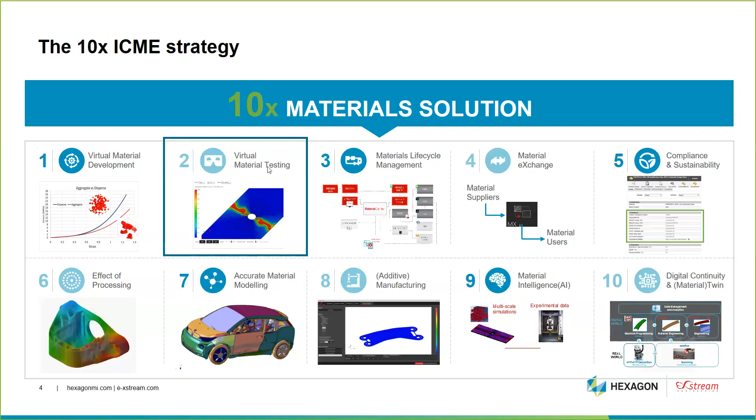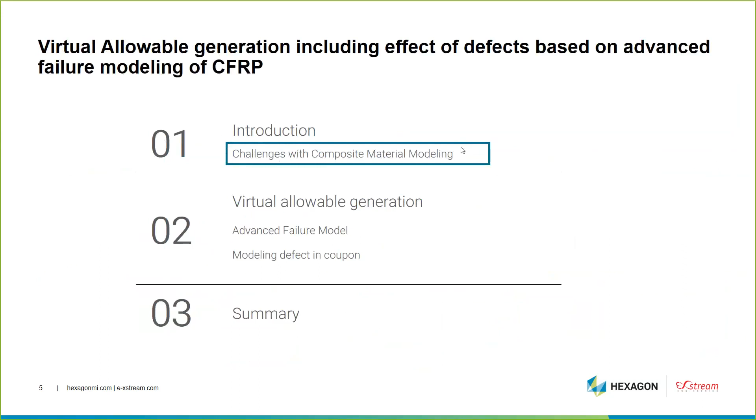So let's start with a presentation of the challenge concerning composite material modeling. That will be short. We know that when we do the insertion of composite material in a new design, we have to follow what we call the building block approach. The building block approach aims to verify the correct choice of the material at every level of that pyramid. The first level of this pyramid concerns all the work that has to be done at the coupon level, from material screening, material specification development, and generation of the allowables.

And since we have introduced composite material into the design, the size of this first level, by the need of comparing and screening different configurations in terms of layup, in terms of coupon configuration, in terms of environment condition, makes this first level of the pyramid extremely time-consuming and requires a very large experimental test matrix. So one of the challenges at this level is to try to decrease a bit the workload associated with all this work at that level.

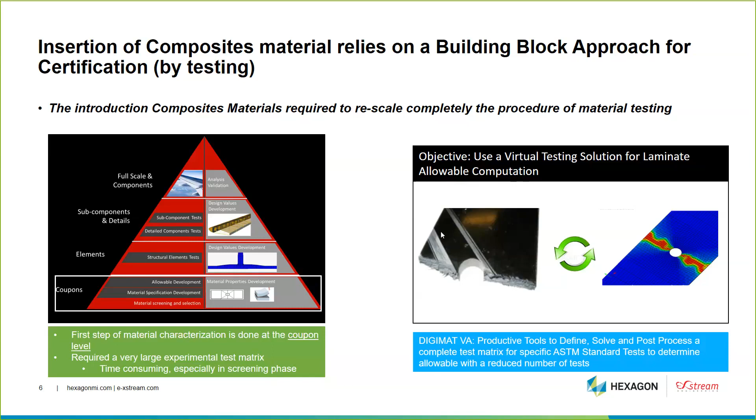So when we started to develop this platform, we had to tackle a series of challenges. And the first challenge is obviously to be able to make an accurate prediction of the failure of the coupon. And as opposed to a metallic material, which exhibits a very clear modification in its behavior, like non-linear yielding, for composite, the only reliable and observable event is the final failure. And most of the time, what is considered as the allowable is the final stress or the final strain.

And when we load a coupon like this, we can observe a very brittle failure, but between the moment we start to load the coupon up to the final failure, some critical events take place on the coupon, such as initiation of matrix cracking, initiation of fiber breaking. And if we want to be able to predict the final failure, we have to use a numerical model that is able to predict all the critical events that take place before the final failure. So that's the first challenge. It's to develop or to use a material model that will be able to predict properly all the critical events that take place in the composite or in the coupon before the final failure.

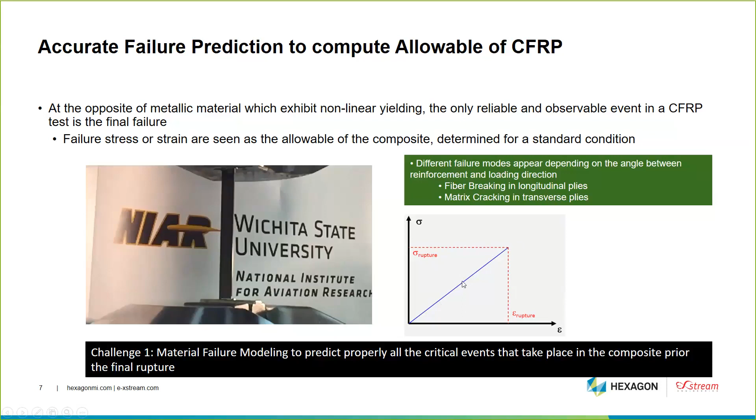Then we have another challenge when we use composite material. If I replicate 5 times, 10 times the coupon that I've just used before, I will never get 10 times exactly the same final strength. So, unlike metallic material, what we observe with composite is a larger distribution of the final strength. So this raises the need to use what we call the allowable material, which would be a material property that is statistically derived from test data coming from a stable process. And this value, which will be used for the design, must be a value of confidence. So that's why we give the possibility to generate a B-basis value to take into account this distribution of final strength of the coupon.

That's the second challenge. If we want to be able to predict a distribution of results like we observe experimentally, then we need the possibility to define a test matrix that will allow us to capture the variability that is expected during the production and during the life of the coupon, variability that can come from several sources. So we give the possibility in Digimat VA to define a test matrix. We follow recommendations coming from the FAA, and this test matrix will allow us to introduce variability at the material level, at the process level, let's say at the generation of the panel, and also what we call the post-process variability, the variability that can come simply from the way we test the coupon. So that's the second challenge: the possibility to insert some variability during the generation of the coupon strengths.

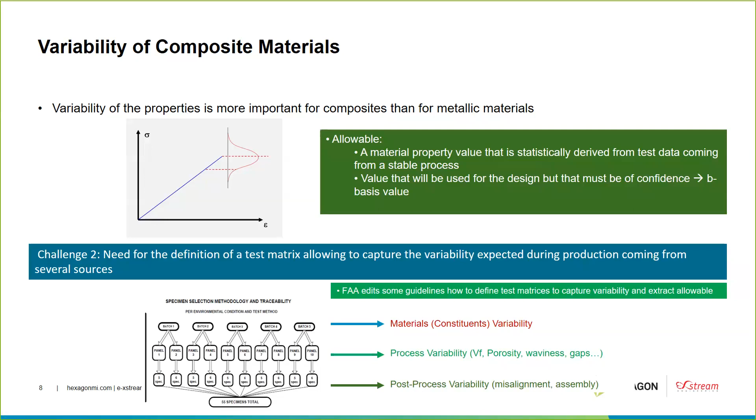A last challenge is the possibility to take into account the effect of defects when we compute the allowables. We know that there are defects that appear in the composite material during the manufacturing process. We have several types of defects, such as porosity, waviness, or fiber breaking, and those types of defects appear no matter the type of manufacturing process that we are using. Porosity can often be associated with RTM process or autoclave. Thermoforming can lead to waviness or fiber breaking. Automatic fiber placement can lead to the presence of gaps in the coupon.

So no matter the manufacturing process, we know that there is some defect in the composite. And we know that the sizing of the composite part, or let's say the value that we use for the sizing, should take into account the presence of those defects that come from the manufacturing process. And each defect will affect the mechanical property, which depends on the type of the defect, the size of the defect, and the location on the coupon.

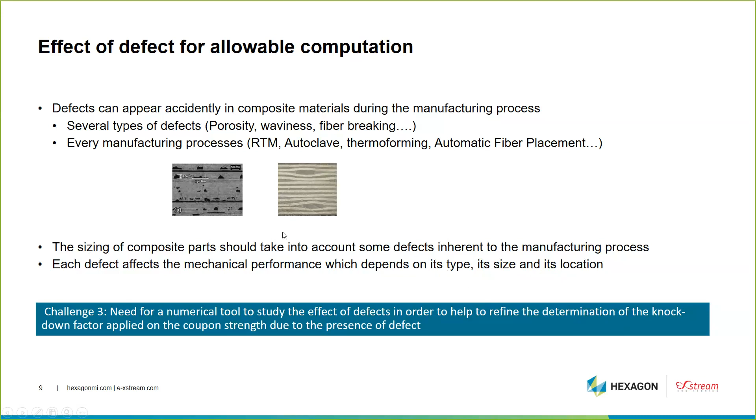So that's why we have a third challenge, which is that we need to have a numerical tool that allows us to study the effect of defect in order to help the refinement of the determination of the knockdown factor that is applied on the coupon strength due to the presence of defect. We will see in detail during this webinar how we handle this third challenge.

So we have put all those capabilities, all this knowledge in the platform Digimat VA, which is our platform to compute virtual allowables. So on this slide, I have given an overview of what Digimat VA is. It's a platform that will allow you to have a very efficient framework to automate the test matrix generation and to execute your test matrix. We'll see in detail how we handle that. And then once you have defined the test matrix, you can post-process and you can manage the resolution of the coupon.

In Digimat VA, we have also proposed a connection to Material Center. Material Center is our material data manager. And then in Digimat VA, we propose also several levels of fidelity in terms of failure model. So we have some tools which are based on the classical laminate theory and associated with first ply failure. That's not something I'm going to show today.

We have also a first implementation of our failure model, which is what I call here the quick failure model, which corresponds to what we implemented when we created the platform, let's say 4 years ago. And we have the new advanced failure model, which is based on an academic state-of-the-art, which is something that I'm going to show you in detail right now.

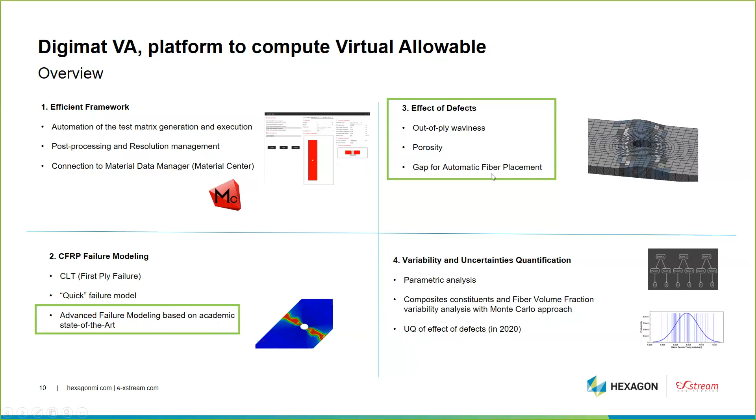So let's go into detail of this new advanced failure model, which is available since the last version of Digimat. If we think about what we need when we define an advanced failure model, this model should be able to predict the critical events prior to the final failure. That's what we have seen as the first challenge. But also, as we know, when we deal with damage in finite element simulation, we'll have some challenges coming from what we call damage localization. So an accurate failure model should have capabilities to limit the mesh sensitivity and the damage localization.

And also, last thing, a damage or material model should be easy to use and should rely on measurable parameters, so parameters that we know how to identify and how to use, and whose meaning in the numerical model we understand. Also, to address material variability, the numerical model must be expressed in terms of constituent properties and fiber volume fraction.

So to answer those needs or those challenges, what we have done is we have implemented a state-of-the-art academic framework, which has been proposed by Professor Camanho. So we started from collaboration with Professor Camanho, and we base our work on those three references. Well, there are more references; those ones are really the ones who proposed the foundation of this numerical model. And this one has been implemented in Digimat 2019.1.

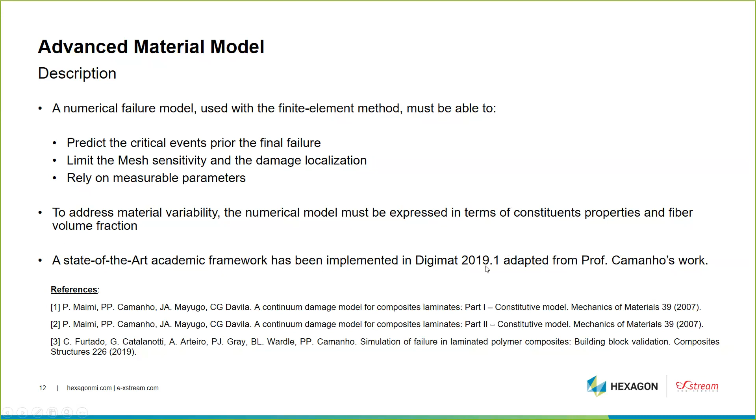So if we look into the detail of the key ingredients of this numerical model, the first point is that we use an elastoplastic behavior coming from the resin. And the way this elastoplastic behavior of the resin is identified, it's extracted from the in-plane shear curve of the lamina. So knowing the in-plane shear curves of the lamina, we are going to extract the elastoplastic behavior of the resin.

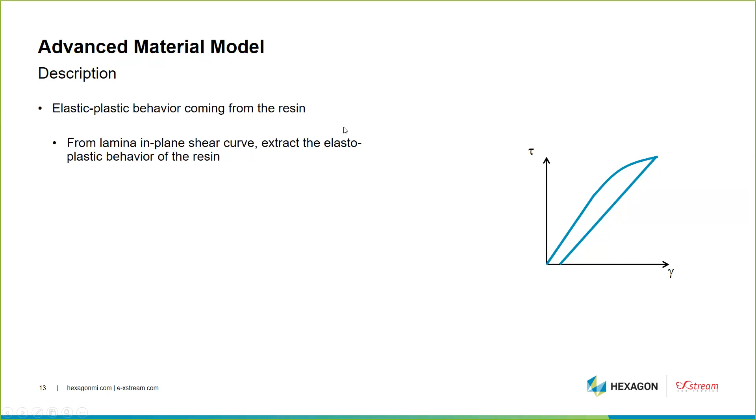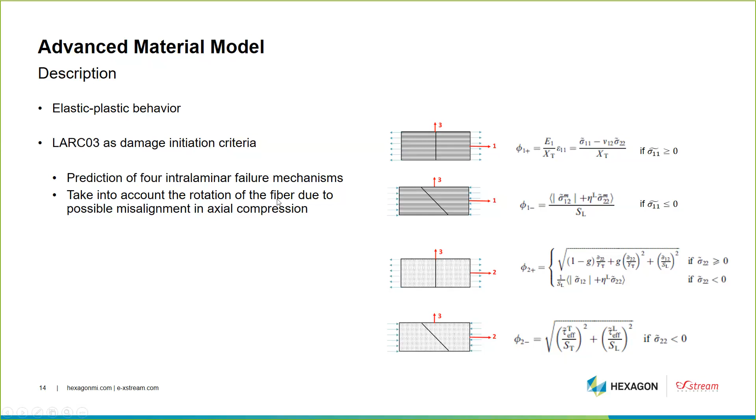Second ingredient of the numerical model, we use LaRC03 as a damage initiation criteria. So LaRC03 is already something well established in the community, and it's a failure criteria that allows to predict intralaminar failure mechanisms. This LaRC03 also has something extremely interesting: it takes into account the rotation of the fiber due to the misalignment in axial compression.

So if we see that in detail, when we are in axial compression, the model will consider that under axial compression loading, the ply will fail due to fiber kinking, where the resin in the vicinity of the local misalignment of the fiber will fail in compression. So this is what is represented here on that scan: we have here a misalignment that appears, and in the vicinity of this misalignment, the matrix will fail in compression.

So in the failure model, the failure model proposes a methodology to compute this angle of misalignment. So this is what is noted phi here, which is based on material property or lamina property. You see that here we use the XC to compute the misalignment angle. It computes also what we call the longitudinal friction coefficient, which also relies on material parameters.

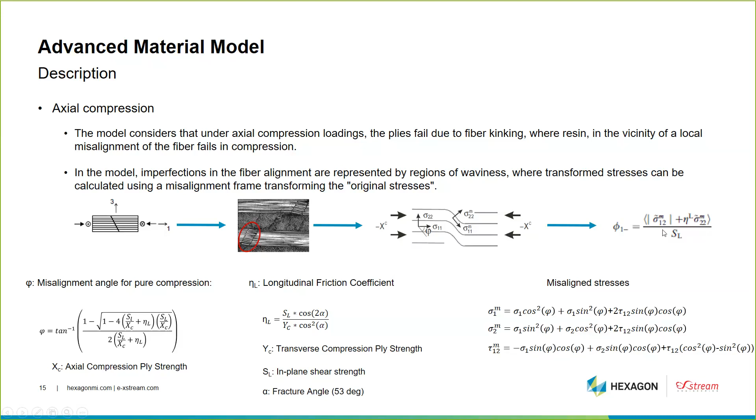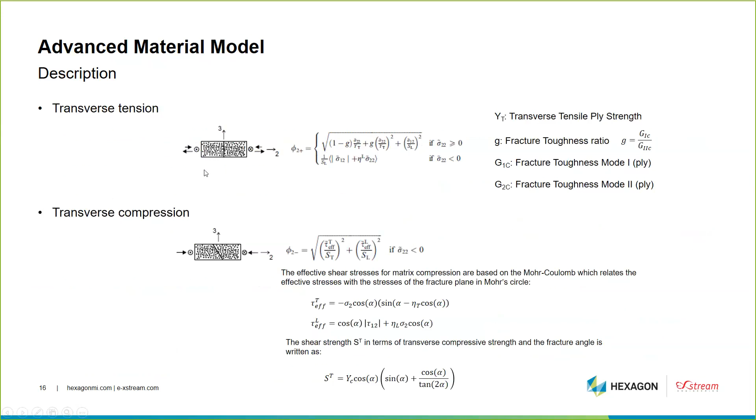So once the misalignment angle has been computed, then the stress can be rotated into the misalignment frame, and the failure criteria can be computed using those rotated stresses. For transverse tension and transverse compression, we always have a combination of the transverse stress, sigma 2, with the in-plane shear stress. So that's the case for the transverse tension, and also for the transverse compression.

So once we have defined and computed the damage initiation criteria, we need to propagate the damage. So we need some damage propagation law, and in this case, we have coded the damage propagation law proposed directly by Professor Camanho. So that's what is called here the University of Porto damage model. And this damage model includes the crack closure. So the damage initiation thresholds are related to damage variables by the damage evolution law. So the damage initiation threshold is LaRC03, and then the damage evolution laws are the ones proposed by University of Porto.

And we have the possibility to take into account the crack closure when we reverse the loading. So typically, if a crack is created under tensile loads, it will close up under compressive load, and the material will recover part of its load carrying capability. So that's why we see here that we have the propagation law R1 minus, which depends only on the compressive condition. But at the opposite, a crack created under compressive load will remain open under tensile load. So that's why here we have R1 plus, which depends not only upon the failure in tension, but also on whether we have seen some compressive load prior to the tension condition.

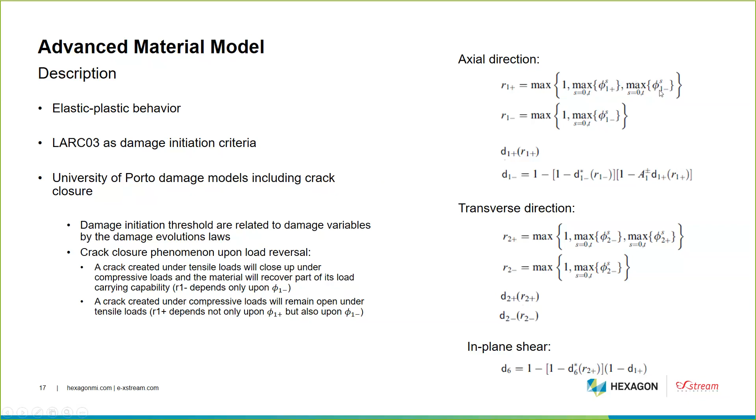So the way those propagation laws are defined, they have a specific shape. They are linear and bilinear softening damage evolution laws. So this is the typical shape that we use, bilinear and linear, depending on the loading condition. And those evolution laws are associated with a crack band model. So here, the propagation law is a function of a physical parameter.

So those propagation laws are defined as a function of the intralaminar fracture toughness to correctly reproduce the energy dissipation during the propagation of the damage. But those propagation laws are also a function of the characteristic length of the finite element to decrease the mesh size sensitivity, making sure that we have the same quantity of energy dissipated per unit area of crack propagation, no matter the size of the element. So typically that's the crack band model. It means that the area under the propagation law is connected in some way to the volume of the finite element.

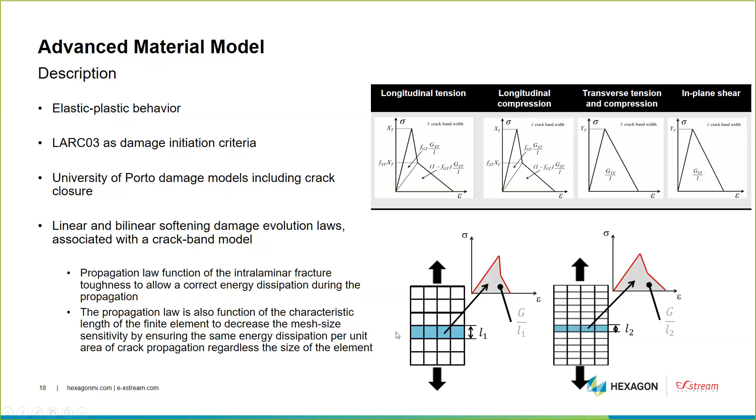Another feature of this model concerns the delamination. In this case, delamination is handled using cohesive zone elements. It's based on cohesive elements, and we use the Benzeggagh-Kenane energy-based criterion to predict the delamination under mixed mode loading conditions. What we have coded is simply the framework that has been proposed by Professor Turon from Girona University in Spain.

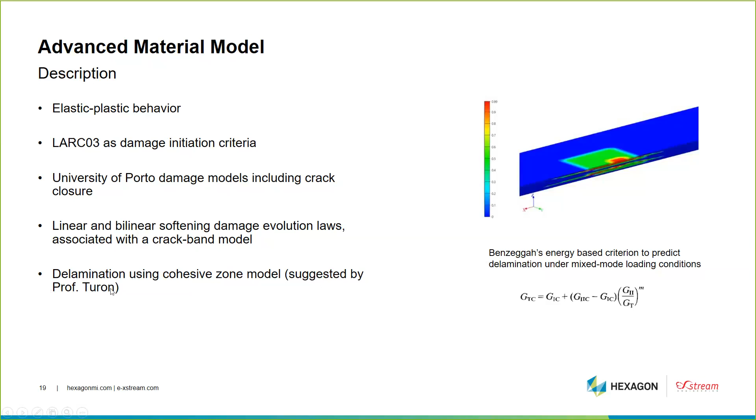The model handles also the in situ strength. The in situ strength is a modification of the strength of the ply, only the strengths that are governed by the matrix, so YT, YC and the in-plane shear. So it's a modification of those 3 strength values based on the localization of the ply in the laminate.

And then the last feature corresponds to the possibility to take into account manufacturing stresses. This is a feature that we added to take into account residual stresses coming from the curing cycle. It means that before we load the coupon mechanically, we apply a thermomechanical load from the curing temperature to the room temperature in order to introduce some residual stresses in the coupon before the mechanical loading. And this is done now systematically once we use this advanced failure model.

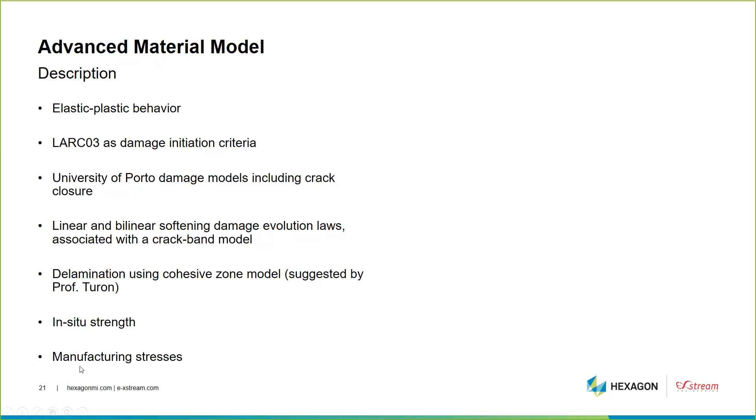So at the end, we end up with a list of material parameters. Typically we have here the lamina data: the stiffness and strength, axial, transverse, tension, compression. This is typical data that we can find in the datasheet. And we need some additional parameters to handle the damage propagation laws, what we call here the intra-ply fracture toughness for the modes, axial, transverse, tension, compression.

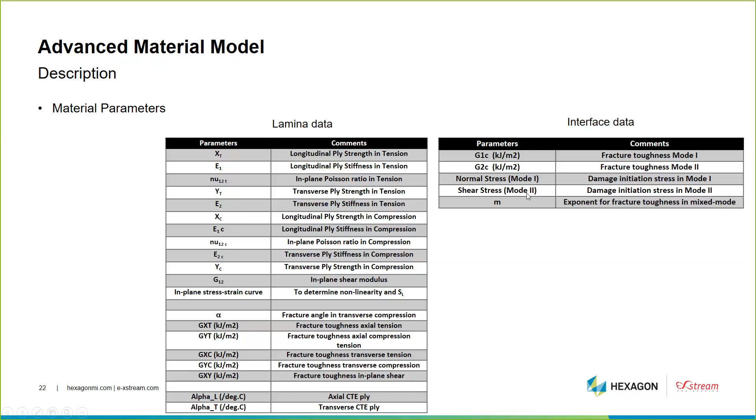We need also the coefficient of thermal expansion of the ply, the axial and the transverse. This is to take into account the residual stress coming from the manufacturing. And then we need also the interface data: the fracture toughness in mode 1 and mode 2, and the normal or damage initiation stress in mode 1 and in mode 2.

This advanced failure model has been implemented in our platform, Digimat VA. For those who don't know, Digimat VA proposes an extremely simple workflow to define, set up and solve a test matrix. The workflow follows specific steps, a very straightforward workflow. First, we have to define the material data, the material parameters that I've just listed, which need to be entered in the software. And then the user has to define the layup. Quite straightforward, we can define any type of layup.

And then we have to define the test geometry. We propose a library of tests, which are all parameterized, so the user can really define the configuration that he would like to test. After that, we have the possibility to insert variability, but like I explained, I won't go into the detail of the variability today. The variability is an option; we don't always have to integrate it. So let's assume that we don't have variability here.

Once material data, layup, and test configuration have been defined, we can go for the resolution. It means that Digimat VA will create a finite element model corresponding to each configuration and solve this finite element problem. Solving it means that we extract the stress-strain curve, and we consider that the allowable is the maximum of the stress-strain curve.

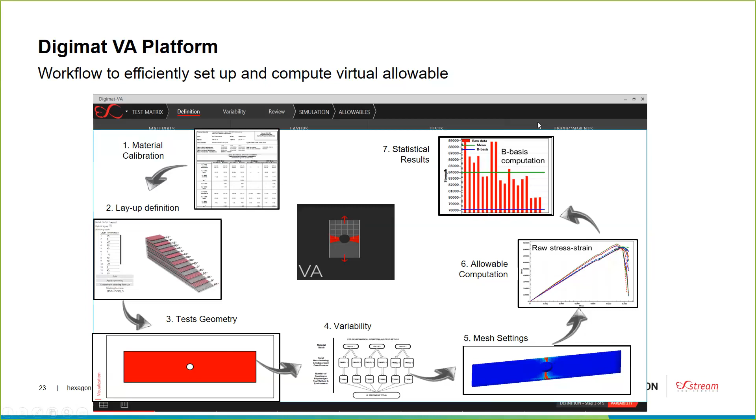So this is, for example, how the parameterization of the coupon is handled in the platform. I will do a demo right after, but during the workflow, the user has to select the type of coupon he wants to insert in the test matrix. So we cover, for example, the unnotched configuration, the open hole, the filled hole, and we also have a configuration I will show on the slide after.

But each coupon has been parameterized, and the user can really set all the dimensions that he wants. For the coupons that have a fastener, like the filled hole and the bearing test, we have also parameterized the fastener geometry, and the user can choose between different types of fasteners, so countersunk, protrusion, and define the properties.

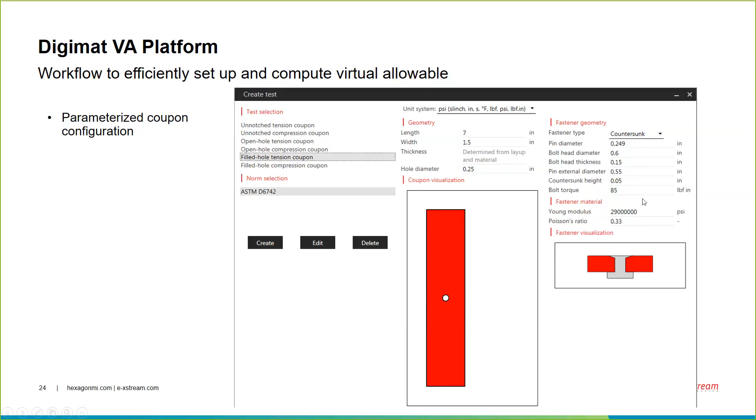These are all the tests that are covered in the platform. So from unnotched test, open hole test, tension, compression, the filled hole, again with different geometries of the bolt, the bearing test, single shear bearing, double shear bearing with one bolt or two bolts, and also the V-notched rail test.

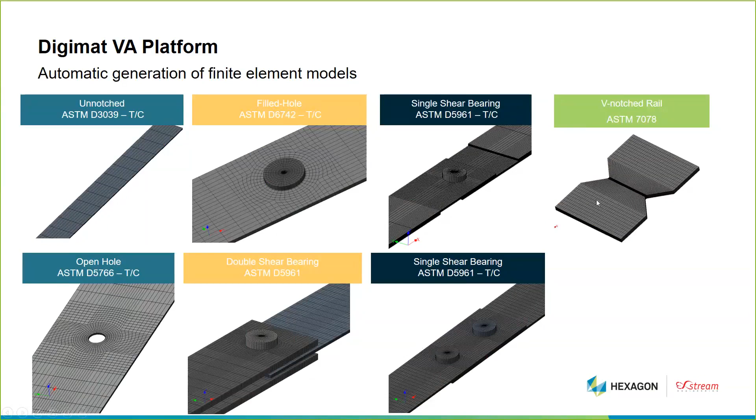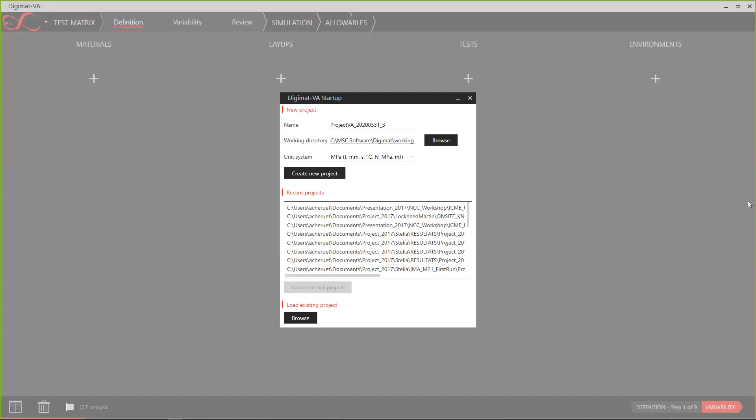Okay, so at this point, I will do a demo just to make sure everybody is clear with the platform. When you open Digimat, you have this first landing page. What we are going to do is open Digimat VA, and then I will create a new project. Here you have the data tree, which gives all the steps of the workflow. So the first step is to create a material.

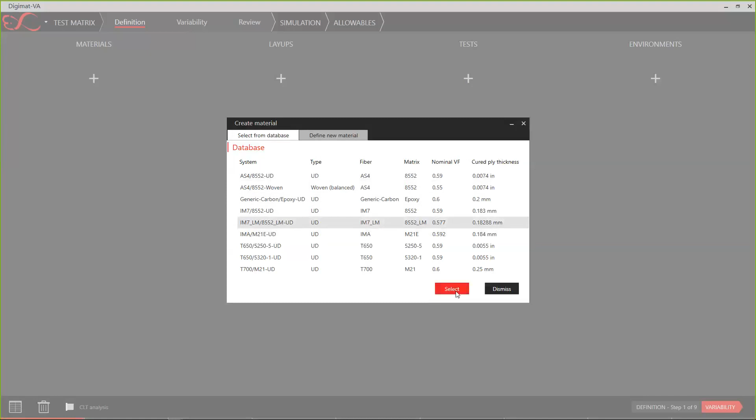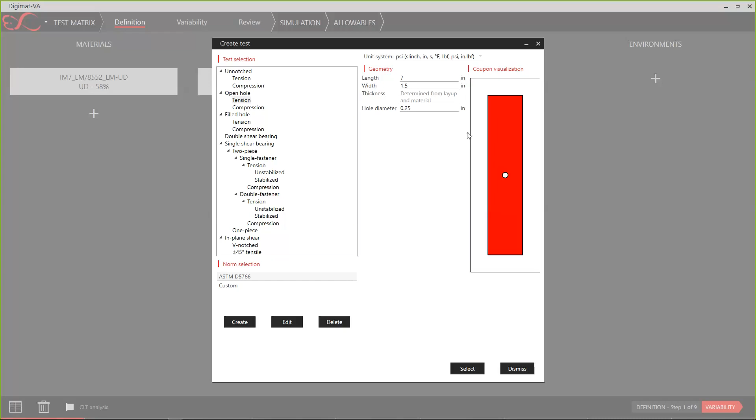So I will select one material here. Let's say I will take this IM7/8552, which is noted here underscore LM, which means last model. This is the name I chose to define the IM7/8552. Then I can define all the layups. You can define some predefined layups and save them in the database to reuse easily for different usages. Here I will select a quasi-isotropic layup, and then you can select the type of coupon that you want to test. I will choose, for example, an open hole.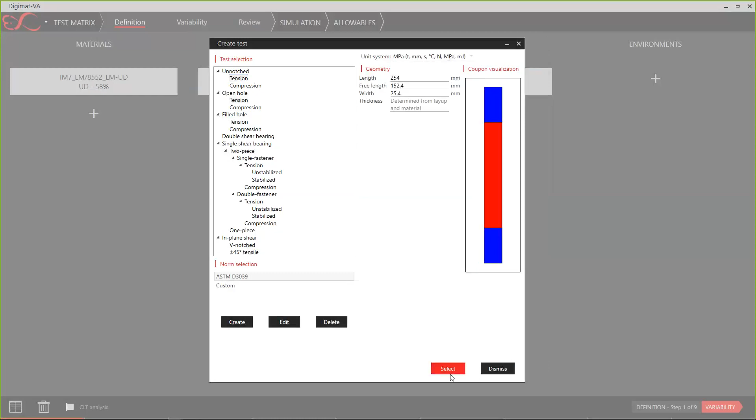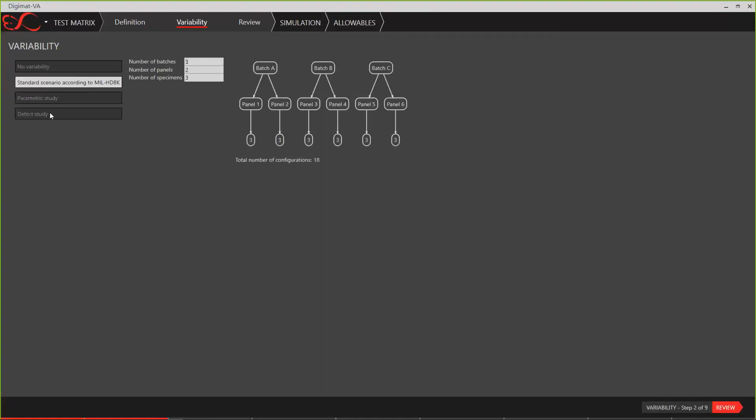If we go back, we can change the unit system, and you can set different dimensions for the coupon. So I select an open hole, and I can also select an unnotched tension. Again, you can set all the data that you like. Then we also define the environment. The next step is to define if we want to insert variability or not, or if we want a parametric study or a defect study. For the moment, I will just choose no variability, and I will continue the workflow.

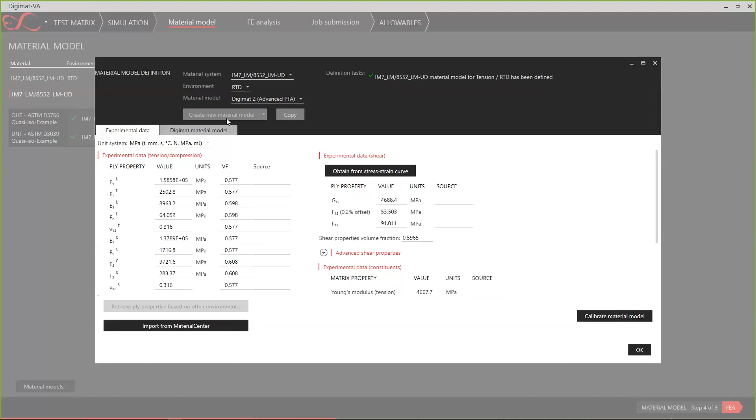And then here we arrive at the material model step. You see that this material has been used in two configurations, the open hole and the unnotched that I have defined. If I click here, for one material we have two different fidelities: the standard PFA and the advanced progressive failure analysis. For this demo, I will choose the advanced one, and I will do the same for the second one. Now that I have selected the advanced one, by clicking on this icon I can open the material tab.

This is all the data that the user has to define: the ply properties, stiffness and strength, axial, transverse, tension, compression. The user also needs to define the coefficient of thermal expansion in the axial and transverse directions. Then we also need to define the matrix properties, the curing condition, and the axial value of the coefficient of thermal expansion of the fiber. This value is quite easy to find in the fiber datasheet, for example.

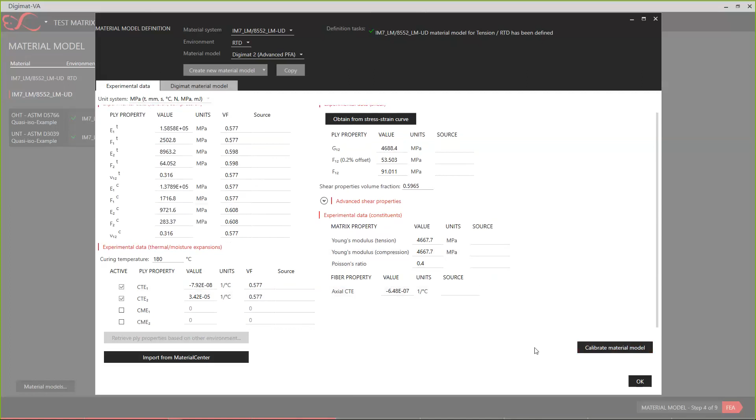So we do a calibration here. When we say we do a calibration, it means that based on the laminate data and the information we gave at the matrix level and the CTE of the fiber, we are going to identify in more detail the matrix properties and the fiber properties. Those can be used if we go for the variability analysis at the constituent level. That's what we are going to use.

And then another additional parameter now needs to be defined. Those parameters are related to the damage propagation law, and that's where the user will have to define the intralaminar fracture toughness: in plane tension, in plane compression, and in plane shear.

So then the last thing that we need to define is the interface property for the delamination. Like I explained, we need the fracture toughness in mode 1 and in mode 2, and the delamination stress or damage initiation stress in mode 1 and in mode 2.

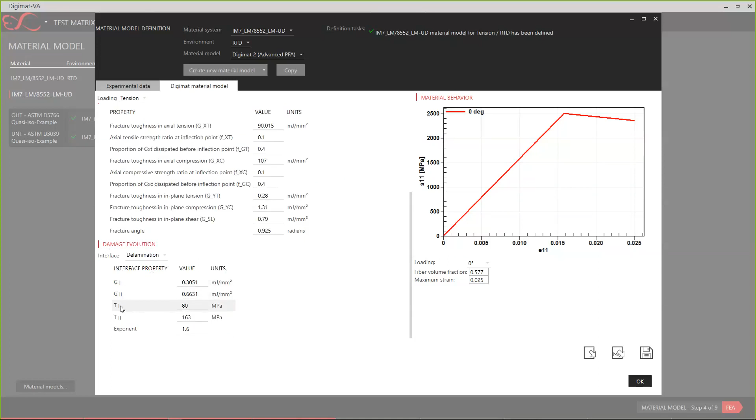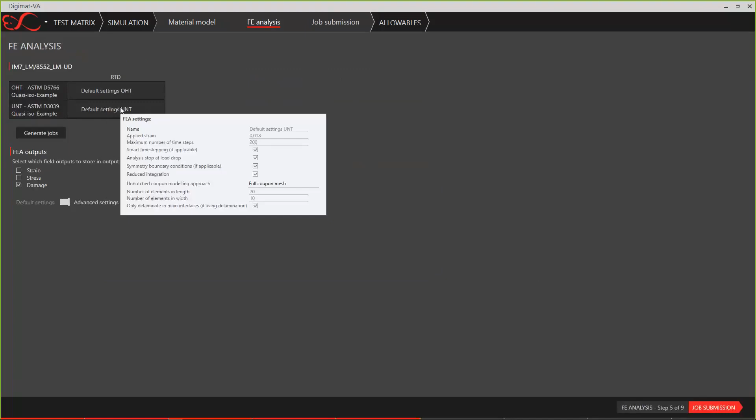Once we have defined those material parameters, we need to define the mesh settings. We have put in the software some default parameters that can be used directly with this advanced failure model. If I switch to the advanced setting, I click on settings, and I have the possibility to create the mesh settings for the advanced failure model. That's what I'm doing here, and some data comes automatically. This is the default value, and this is what we use for the moment, for example, for all the validation work that we have conducted.

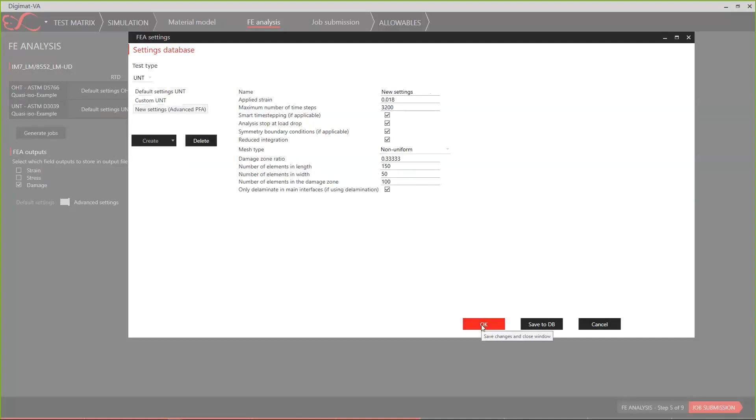So one for the unnotched, and then I need to do the same for the open hole. For the open hole, we can create the advanced model mesh settings, and they are created here. What I need to do now is apply those settings on my coupon. And now I can generate the mesh. I can visualize the open hole tension mesh, and we can zoom a little bit around the hole.

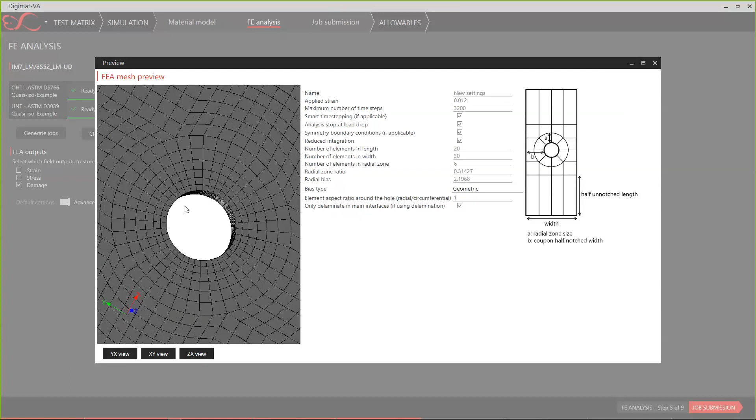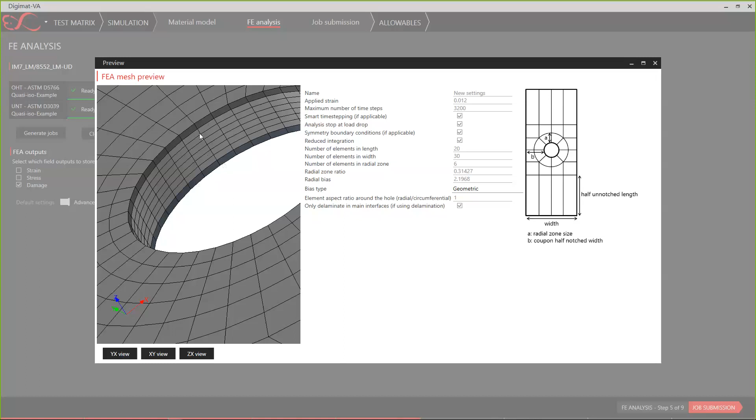We see here three colors through the mesh. This means that we have actually three different materials. This is due to the in situ strength of the composite. This one because of the symmetry, this one because it's an external ply, and those ones are nothing special; they are just inside the laminate.

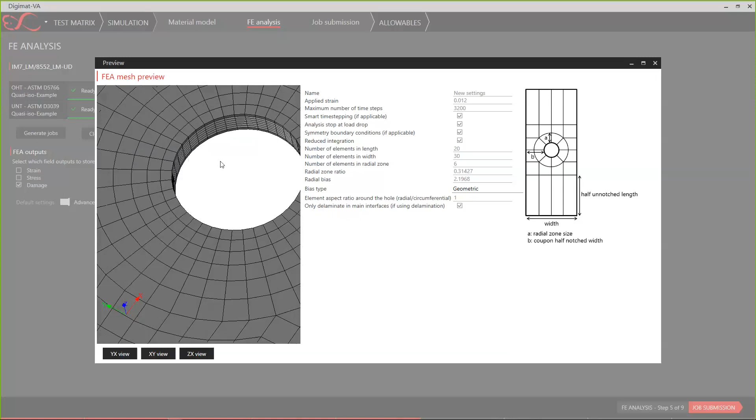The mesh settings are done in such a way that we respect some rules for the meshing. We try to have square finite elements, and the default mesh settings are computed so that we respect a dimension that ensures a correct description of the failure and the failure propagation. That's what we have for the open hole, and also for the unnotched coupon.

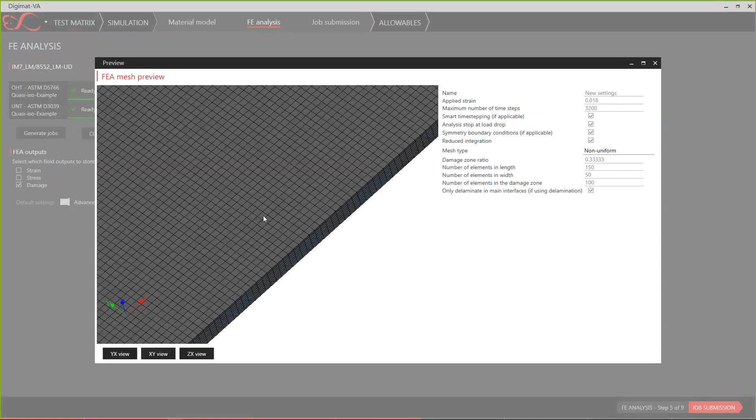Again, if we zoom, we have a specific size to make sure that we reproduce the failure properly. And we also have different colors. Again, this is due to the in situ strength and the position of the ply within the thickness of the laminate: whether we are at the symmetry plane, external, or inside the laminate.

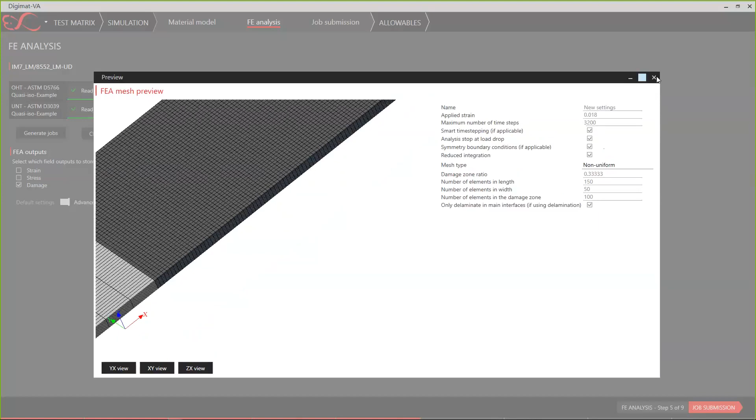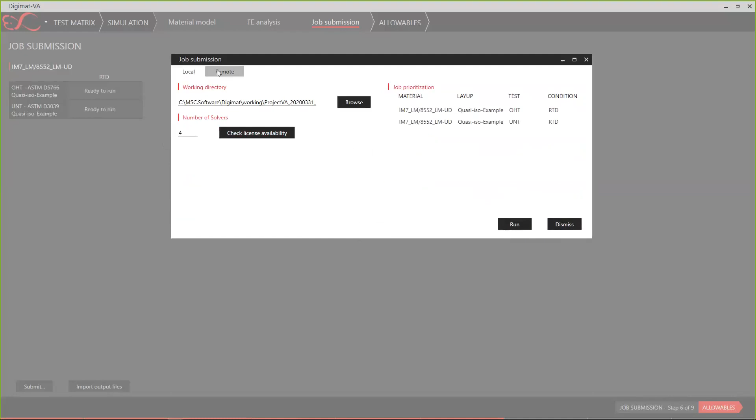Once we have done this, we can execute the test matrix. I will not do it because it takes quite a lot of time, so we don't have the time to run those coupons here. But just to mention that it's possible to use parallel resolution and a remote solver. If you have installed Digimat VA on a cluster or an HPC computer, then from your laptop you can submit the jobs remotely on your machine.

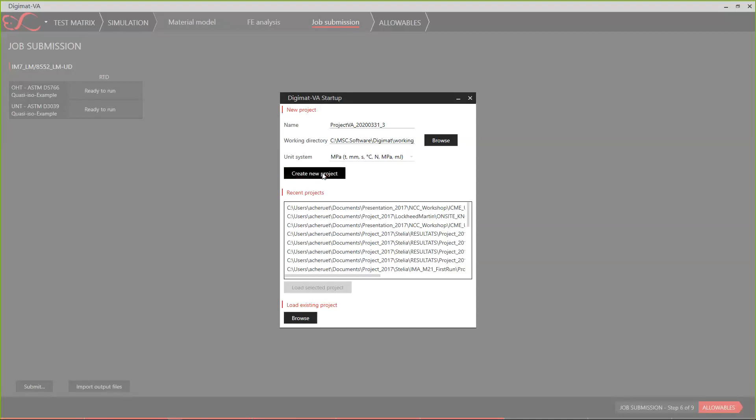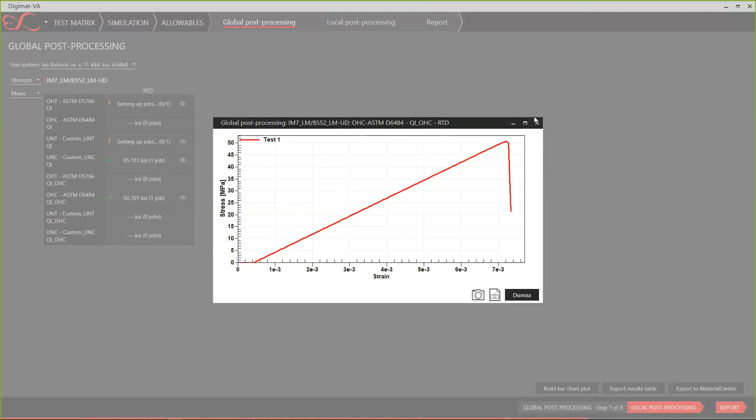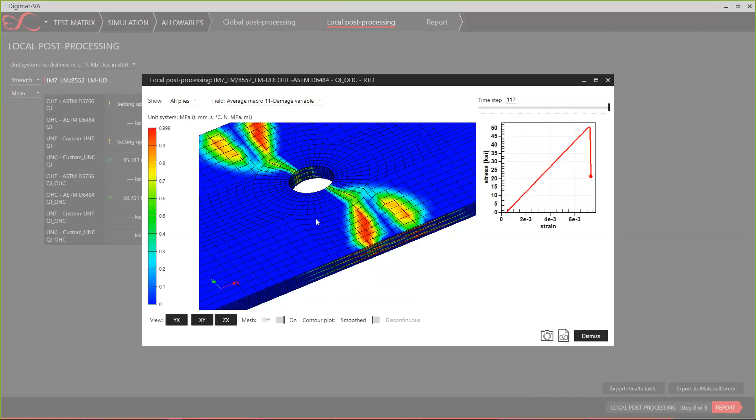You also have the possibility to do a local post-processing. Local post-processing gives you access to the detailed post-processing inside the coupon. Typically you can visualize the damage variable: the damage variable in the axial direction, in the transverse direction, and in the interface, so the delamination.

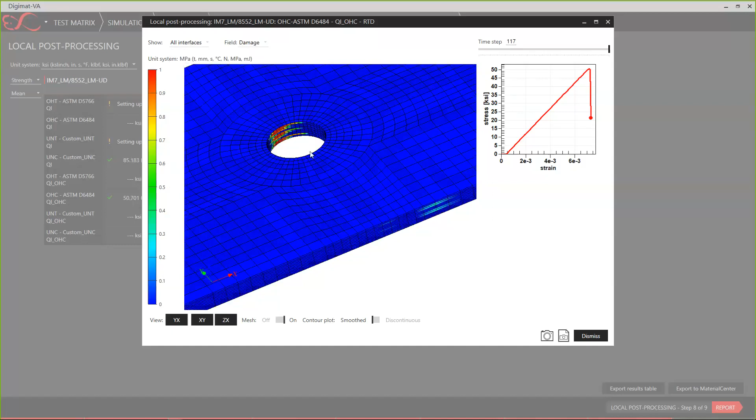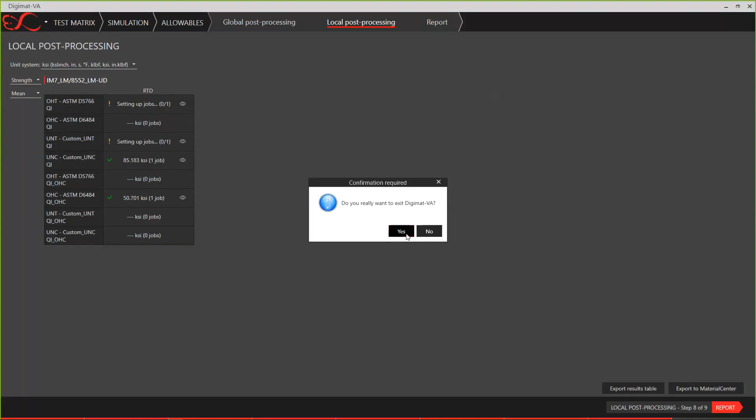So to visualize the delamination, I simply need to select all interfaces, and then, if I remove the first one, we have the possibility to verify if delamination takes place in the coupon. So this is it for the demo. You see that it's quite an easy workflow. It doesn't require too much time to be very comfortable with the platform.

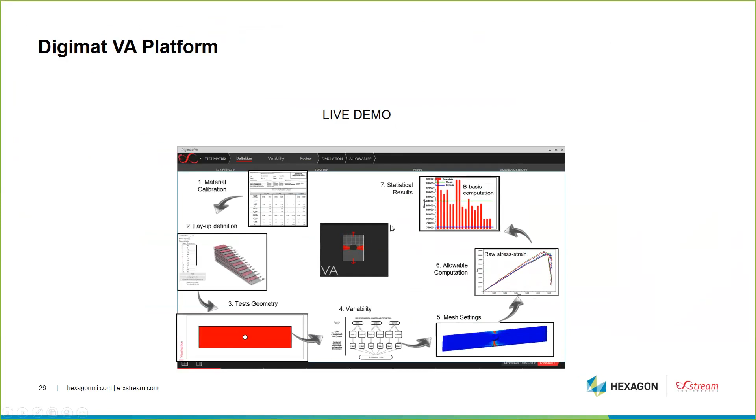So you see that we have tested the T800 M21, the IM7-8552, the AS4-8552, and the IM7 with the 977-3 resin, and another composite that we cannot disclose the name of. Those materials have been tested in unnotched tension and compression and open hole tension and compression. They all consist of intermediate or high modulus, high strength carbon fiber and an epoxy resin.

And those have also been tested on several types of layup. So we have here some quasi-isotropic layups, some hard layups with 50% of plies oriented at 0 degrees, some softer layups with 80% of the plies oriented at ±45, but also some non-traditional layups and some layups that present ply bunching.

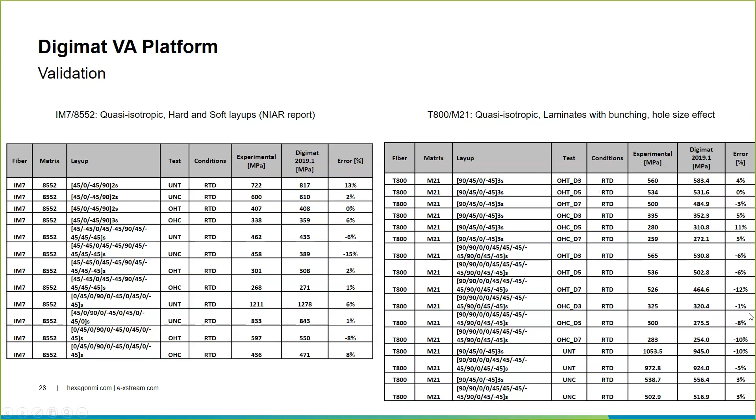And one thing that I have not mentioned so far is that all those tests, all those values, have been obtained with exactly the same configuration for the unnotched test. All the unnotched tests here, no matter if tension or compression, have been run with the same mesh settings and the same solver settings. And that's the same for the open hole. All the configurations, tension, compression, have been run with the same mesh settings and the same solver settings.

So it means that the default mesh settings that I have shown just before have been used and have not been changed from one configuration to another. We don't need to change the mesh settings if we are dealing with a hard layup or soft layup. There's no rule of this kind. We just use the same mesh settings, no matter the layup and no matter the test.

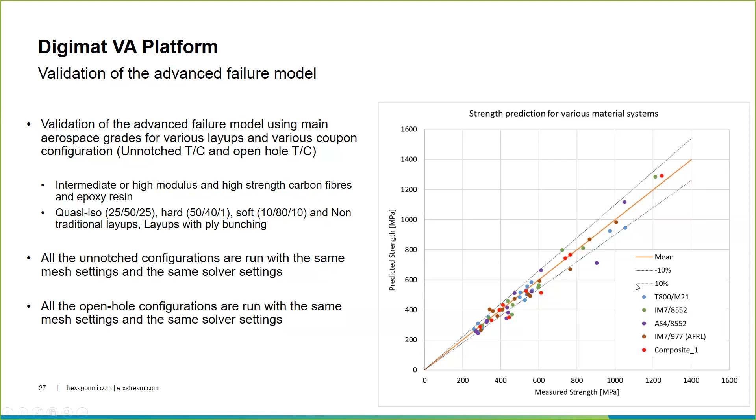Okay, some other example also of validation. So here it's interesting work that we have done just to show the effect of manufacturing stresses, where we can show that it improves the accuracy and it will lower a little bit the coupon strength. So this is a work that has been done using the data coming from the AFRL benchmark that was proposed maybe 3-4 years ago now on this type of material, IM7-977-3. What is interesting here is, in addition, it uses some non-traditional layup where we have plies oriented at 30

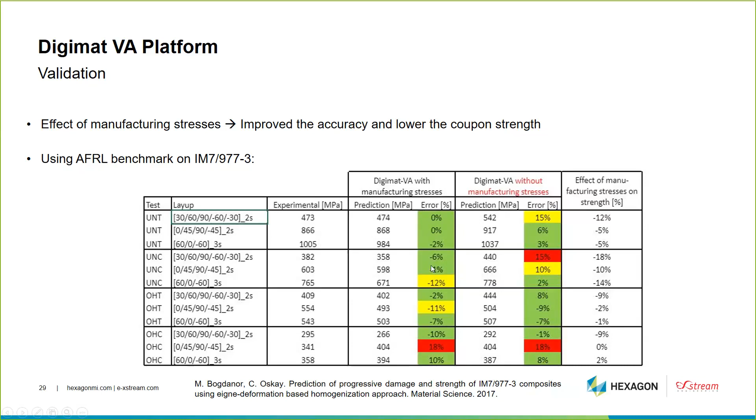Okay, so let's move on now to the next part of this presentation, which is now the possibility to introduce or to couple this failure model with the effect of defect. So, like I explained, we have introduced in Digimat 19.1 the possibility to insert a defect in a coupon, and I'd like to mention that this work related to the effect of defect is supported by a Clean Sky 2 project. So the Clean Sky 2 project is CDESK, and it's done in collaboration with Airbus, which is here the topic leader. And we are working with two other partners, so Cenaero, which is a research center in Belgium, and Sonaca, which is an aerospace tier one, also located in Belgium, and who develop some slats and leading edges.

So in this project, we are dealing with three types of defect. The first one is the porosity in the composite. The second one is the out-of-ply waviness, and the third one is the gap from automatic fiber placement. So the reason why we wanted to focus on the effect of the defect is because we had the objective at the origin to build a numerical tool to study the effect of defect in order to challenge the defect acceptance criteria for future aircraft part development.

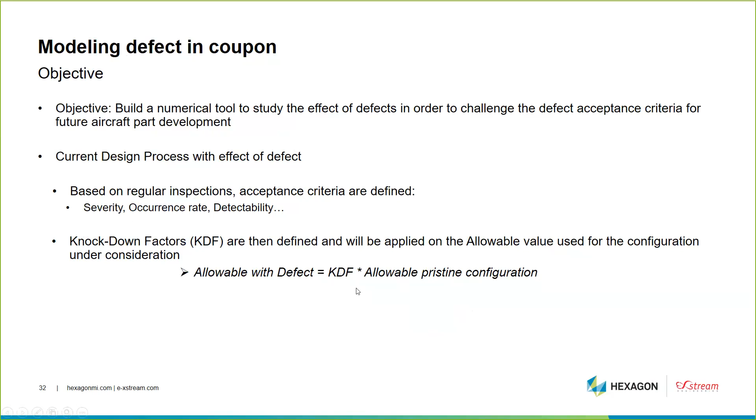So the first defect that we have to deal with is the out-of-ply waviness. And when we think about the waviness, we have to try to understand or to visualize what is the out-of-ply waviness in order to define properly the specification of the development. So if we check here, we see that when we have the waviness, the fiber orientation must follow the waviness of each ply. We can also observe some large variation of the ply thickness due to the waviness. So it means that if we have variation of the ply thickness, we have a variation of the local fiber volume fraction, which probably will affect the local ply in terms of stiffness and strength. We have also probably apparition of out-of-plane stresses that will contribute to the delamination, especially in compression.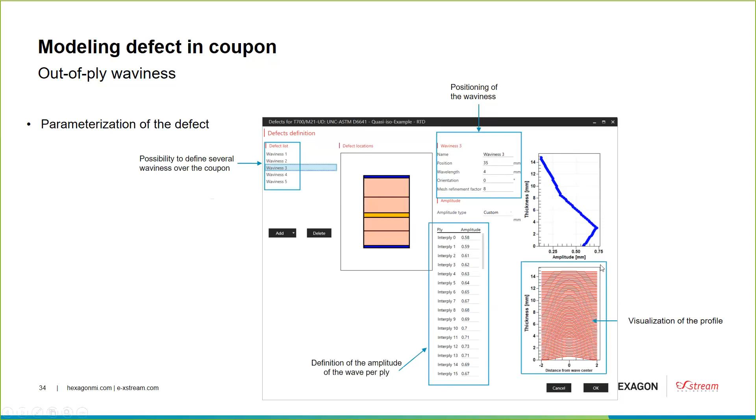So the idea of this development is to run the coupon with and without the defect. So without the defect is what is written here, the pristine one, and to extract the knockdown factor. So typically here I run a coupon. This is this defect. So we see here quite a severe amplitude waviness in the coupon. And then we can extract the strength with the defect and the strength without the defect, and we can compute this knockdown factor.

We can also do the post-processing and identify the failure mode, and we see that for some quite severe waviness, the main failure mode is mainly delamination and very little damage in the matrix here.

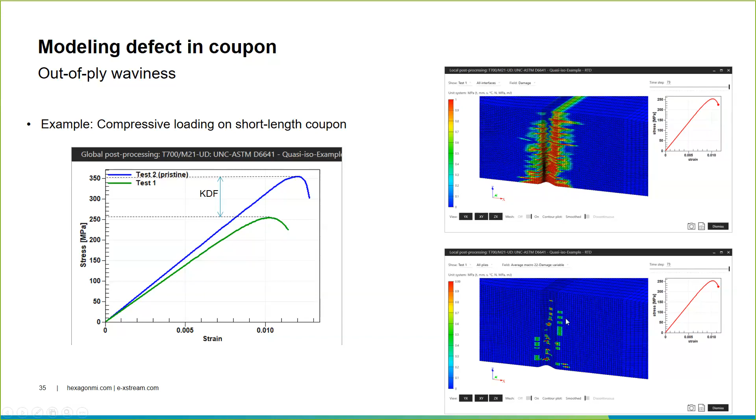The third defect that we can deal with is porosity. So when we had to think about the way we want to define the porosity, we need to understand that the porosity is surface information. So what is done typically in production, we have a technician here who will have an ultrasound system and will try to detect the porosity through an attenuation of the signal.

So what is done is we measure the attenuation of the signal, and when different attenuation is identified over the surface, it means that we suspect the presence of porosity through the thickness. So we have only that information on the surface because we don't systematically cut the plate just to verify the level of porosity. So that's why we just know where the porosity is suspected to be through the thickness of the laminate.

So when we detect an area like that with an attenuation of the ultrasound, then we give a kind of normalization of that area. So we, let's say, define a rectangle, and then it means that for all the material under this area, we consider that we have the presence of porosity. But we don't have any information on the distribution of this porosity through the thickness.

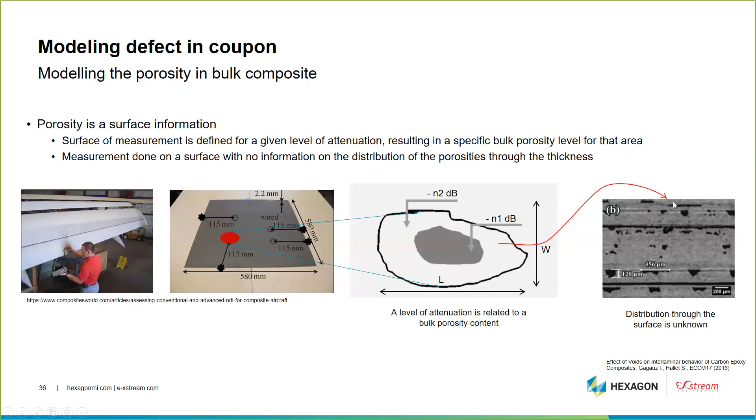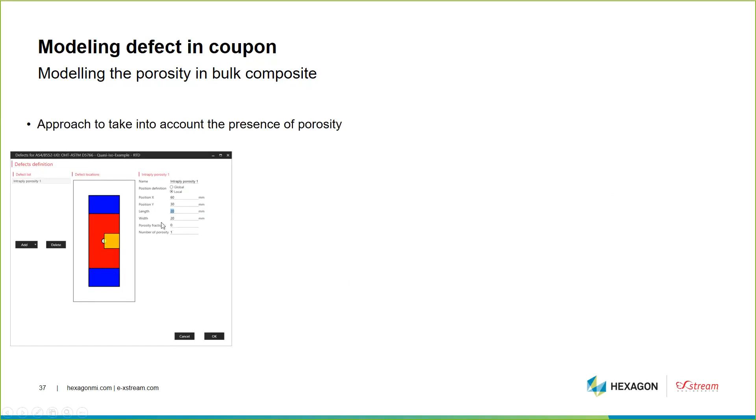So the way it's done in the software, again, when the user defines his coupon, he will have to define a specific area where he wants to study the effect of the porosity. So he can consider that the porosity is present all over the coupon, but it can also be in a limited area, like on this orange rectangle. Then he has to define a porosity fraction, so let's say 3% or 5%.

And then what is done behind the scenes of the software, Digimat is going to compute the lamina property, but taking into account the porosity. So we are going to build a kind of multi-scale approach here. We go back to the lamina level, we insert some porosity, and we estimate the knockdown factor on the lamina property and interface property due to the presence of the porosity.

So it means that when we run this coupon, we will have two materials. We will have one material here in the red part, which is the pristine material, and another material under the orange part, which will be the material with this new property taking into account the porosity. And then we can run the coupon with two types of material, and we can compare the pristine coupon and the coupon with porosity.

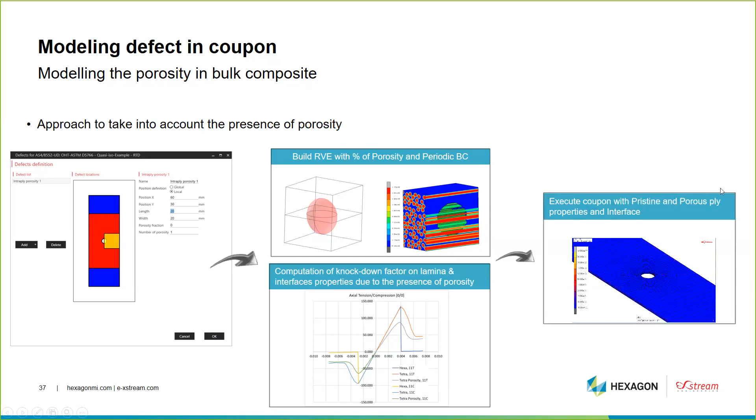So typically, this is some result that we have for the ply when we have introduced 5% of porosity. So this is the first step of the workflow. First, the ply property in presence of porosity, and then we solve the coupon, the pristine coupon without porosity and the coupon with the porosity, and again, we identify the knockdown factor.

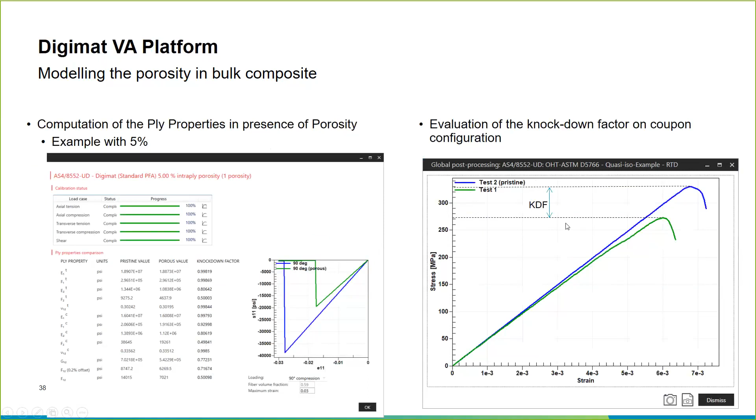Okay, so the last defect, it's the gap coming from the automatic fiber placement. So the automatic fiber placement, it's a very promising manufacturing process, where we have a robot that comes and makes the deposition of strips of unidirectional. And once we have to rotate the robot, or when we have to do the deposition on a double-curved surface, some gaps appear between those strips, and we want to take into account the effect of the presence of those gaps inside the coupon.

So here what we do is we evaluate the knockdown factor on the flat coupon configuration due to the presence of the gap or due to the misalignment. So here, it's important to understand that the position of the gaps and their characteristics, mainly the size, are defined by the user directly in the user interface of Digimat VA.

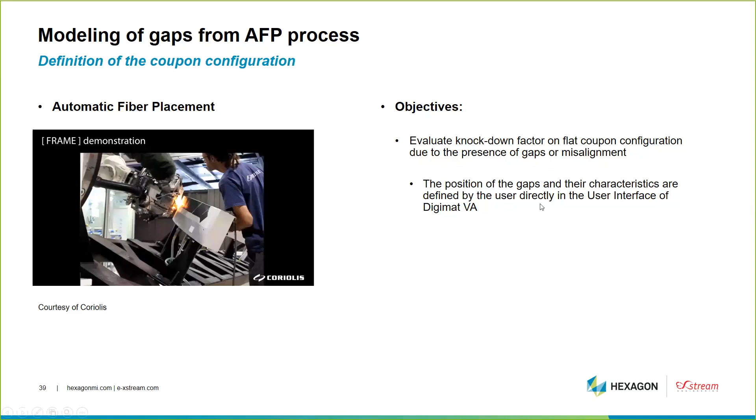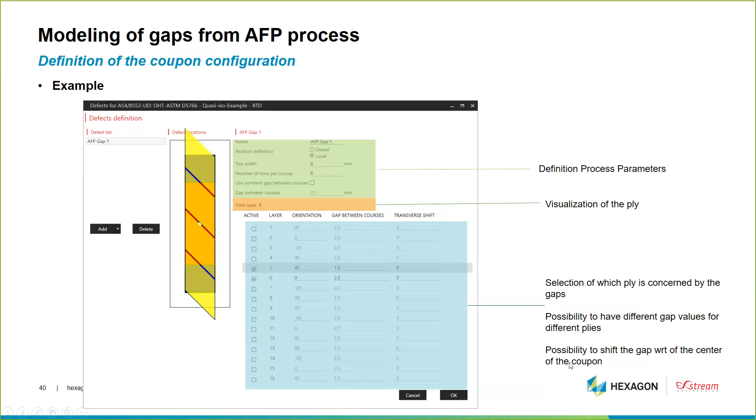So once the gaps have been defined, they will be mapped onto the mesh. So the gap is a geometrical definition, but we have the mesh, and the mesh is always the same. We don't change the mesh if we are dealing with gaps. We are simply mapping the gap onto the mesh. And then, based on the location of the gap on the mesh, we are going to refine the fiber volume fraction based on what we call the percentage of coverage.

So if you have, for example, no gap in one element, then we won't modify the fiber volume fraction. If you have some element which is just at the limit between the gap and where there is no gap, then we will adapt the fiber volume fraction based on its location with respect to the position of the gap. All the elements which are exactly in the middle of the gap, for example, will have a very low fiber volume fraction. So they will have the resin property in this case.

And this adaptation of the material property is done using the mean field homogenization. So again, based on the position of the element with respect to the gap, we are going to modify the material property to take into account the fact that one element can be exactly in the middle of the gap, and one element can be at the limit between the gap and the composite or the ply.

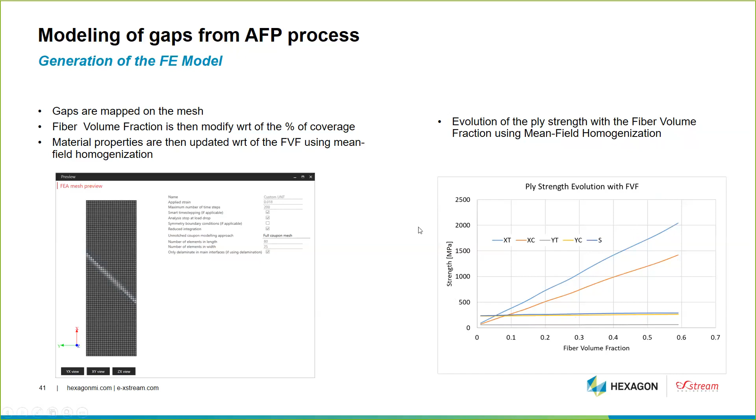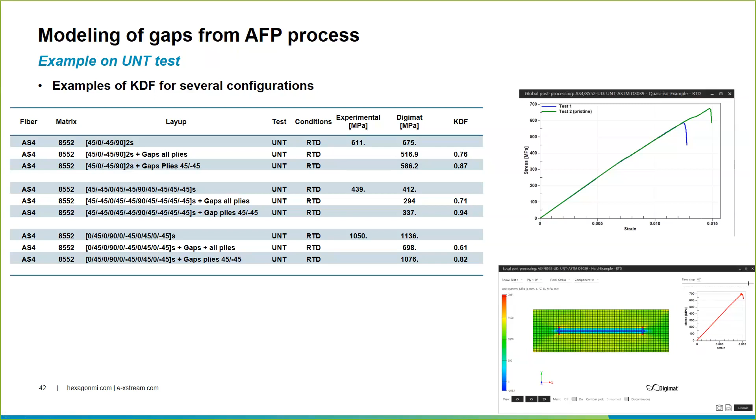So what I have shown you is the possibility to compute virtual allowables by taking into account the effect of defects. And now it's based on an advanced failure model for continuous fiber reinforced polymers. The prediction of the coupon strength is done with Digimat VA. We have seen the workflow, how we define the material, how we execute the test matrix. Digimat VA 2019.1 contains two major features.

The first one is an accurate material model, and we have seen that we now have good correlation for several aeronautics grades and several layups for unnotched tension and compression, open hole tension and compression. That also gives the possibility to explore the design space, to consider any type of layup for material screening, for layup configuration consideration. The second major feature is the possibility to introduce a defect in the coupon.

So here we have the possibility to take into account the defect in the coupon and to compute a knockdown factor on the coupon strength. We solve the coupon without the defect, we solve the coupon with the defect, and then we compare the strength. So this also allows us to refine the current method used to estimate the effect of this defect at the coupon level. So it's a refinement on the way we compute this knockdown factor.